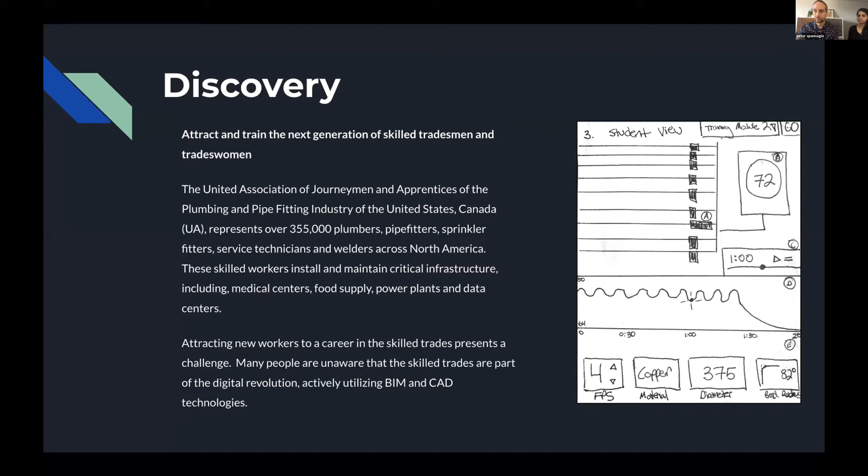So then, as we left discovery, we zeroed in on an MVP solution. We wanted to recreate our in-person training as rich interactive content. We wanted to include IoT data monitoring and visualization, particularly to be able to run these IoT simulations based on the historical data. And two other wow factor items for us were the ability to insert 3D objects, to have these teachable moments and to break down complex information, as well as to offer students and instructors the ability to learn, whether it would be in web, mobile, or VR.

The features that you'll see today will move from a brief presentation into the full demo of our working code here. A few features I want to quickly highlight. So within our solution, you can link a Matterport scan, but you can also upload really any 3D scene or model. For the educational use case, we had the ability to add rich content and quizzes, as well as to track student progress and scores.

We'll see today the IoT monitoring from multiple data sources, the ability to have failure simulation and play and pause of the simulation data for a teachable moment. We have the basic functionality for a two-way IoT interaction, as mentioned, and the ability to insert 3D objects and API integration with Forge and BIM 360. As for the technologies that underlie the solution, we used a React web app, the Matterport SDK, the mentioned Forge and BIM, and also used A-Frame.

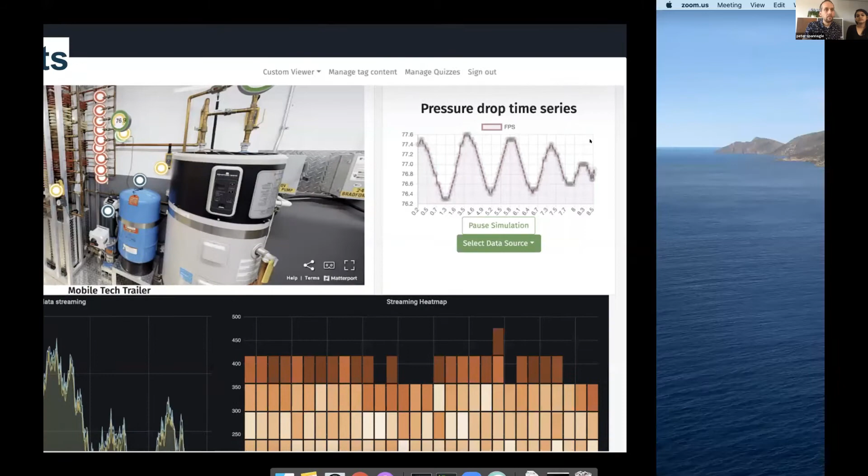Let's go ahead and move over to the demo. Let's see. There we are. I think I got to get out of full screen. There we are. Cool.

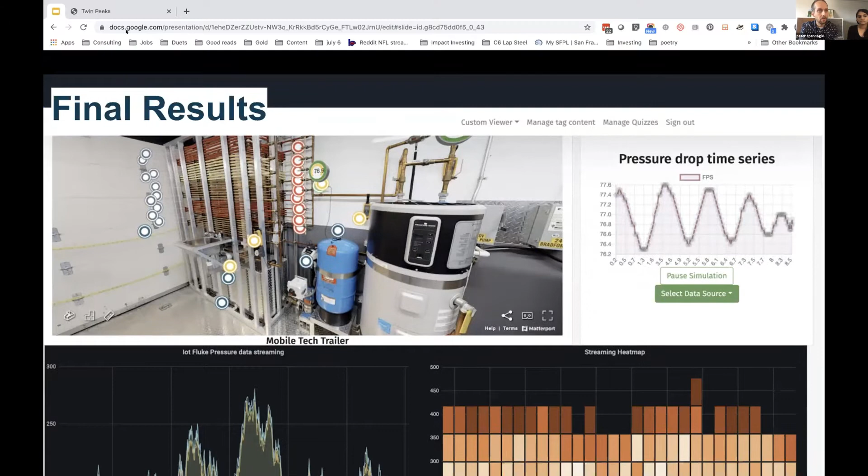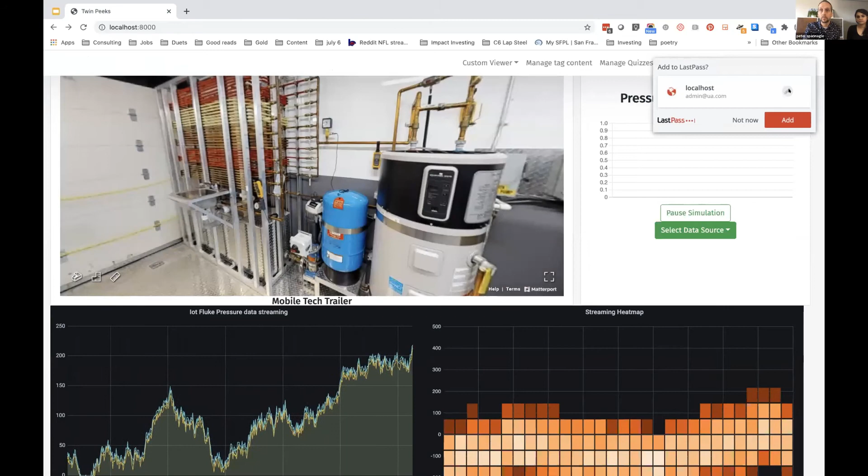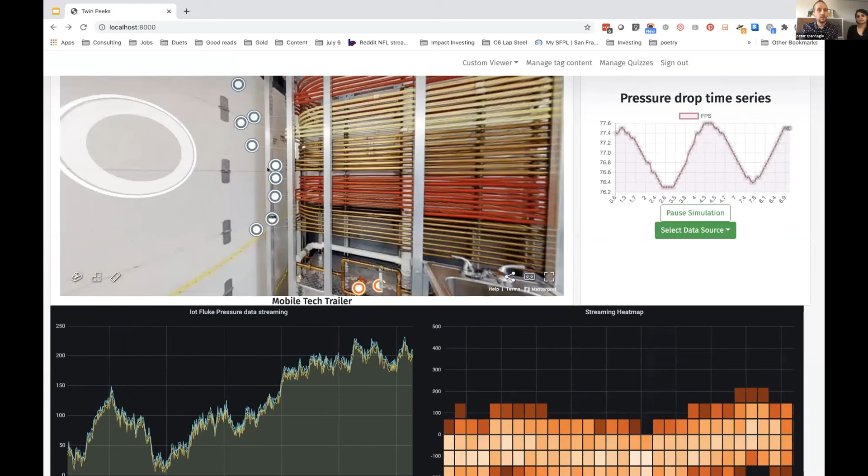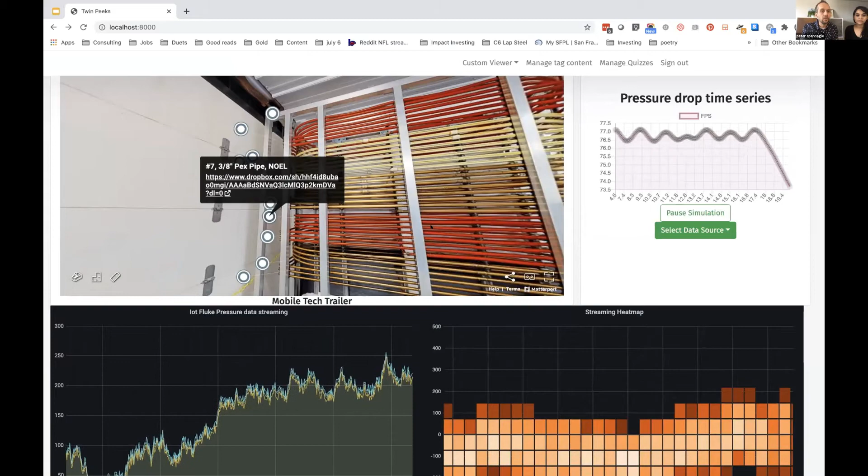So we'll start out by simply logging in. And that drops us into our dashboard. Up front, we see our digital twin. This has been enriched with a variety of tags, content added by the UA that helps to turn this into more of a training environment, as well as

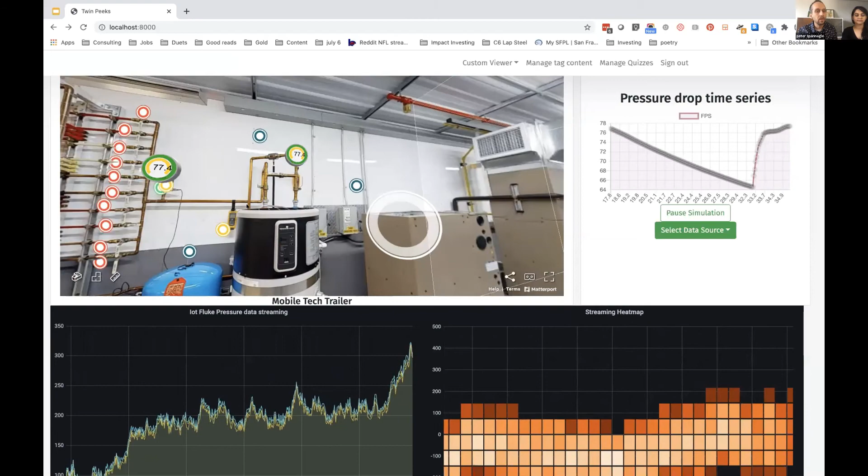the incorporation of these gauges, which are providing live readout of the simulations that you're going to see running here on the right. So this is the virtual training of the hydronics module that's using the historical data provided from their Fluke sensors. And you have the ability to play and pause the simulation to have a teachable moment around why pressure drop may have occurred.

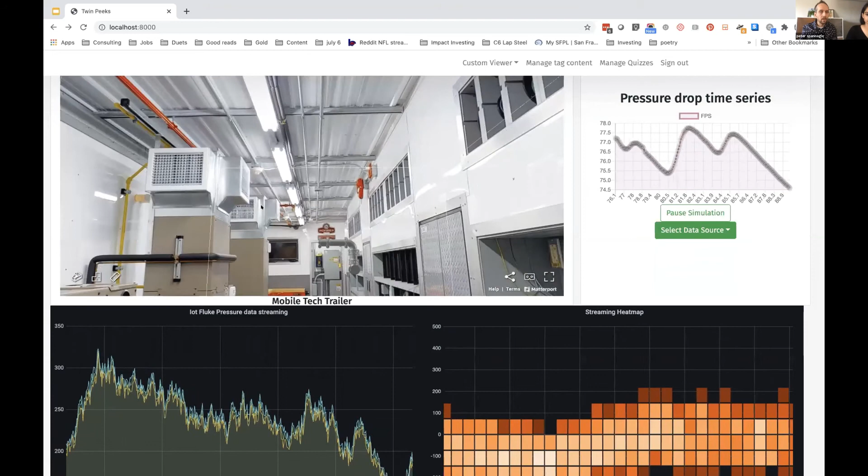We have the ability to use a variety of data sources that have been provided, and obviously to extend this. And as well, I mentioned the option to embed 3D objects directly inside of the digital twin.

Down below, we have the Grafana installation. So we mentioned UA wasn't able to provide us with the live IoT sensor data. So instead, we've focused on the historical and having the training data running there. And we've included here the ability to counterpoint that with the live sensor data that we'd have flowing in down below.

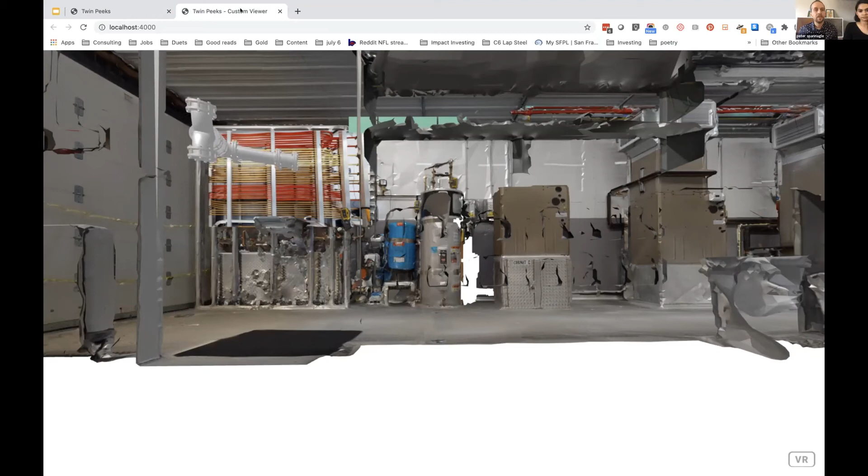A few other options I wanted to briefly run through with you. The custom viewer. We were quite excited about the ease of use of Matterport and some of the cool features built into the Matterport SDK, which we explored. But we also wanted to open up a range of features and possibilities that were unlimited. So here we've used A-Frame to import the Matterport scans, the OBJ.

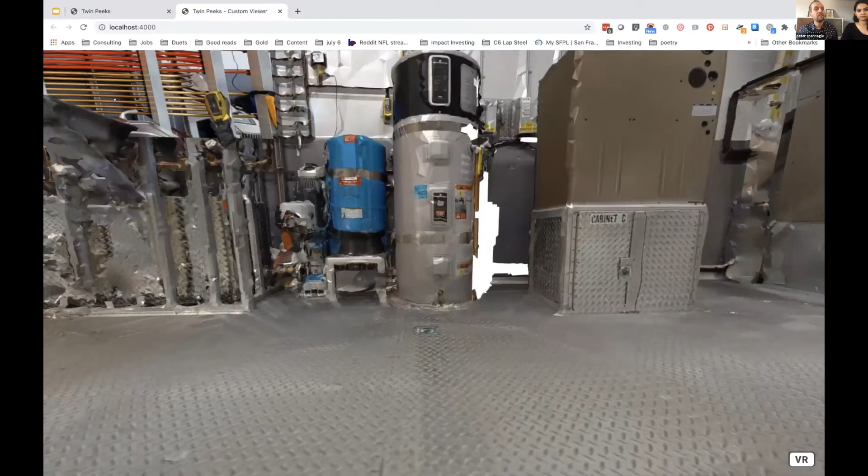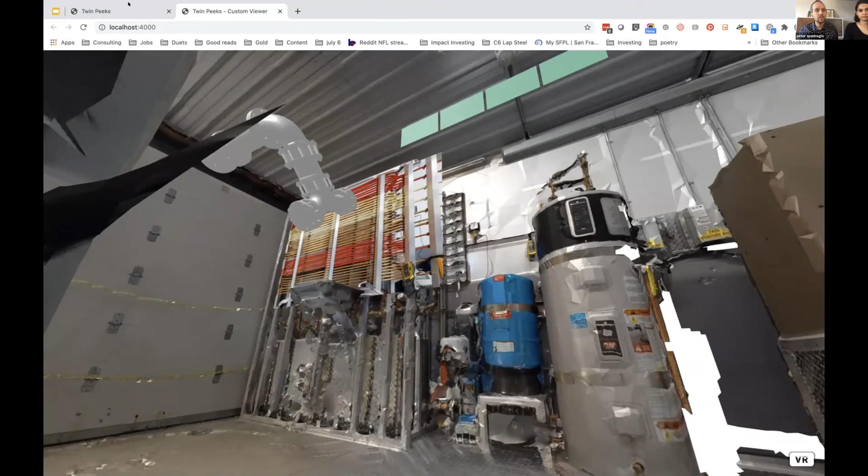Here you can see, for example, we start to show how you can embed the 3D objects, have menus and ways to interact. So this gives us flexibility to import any 3D scene object and to take on functions that would be outside of Matterport.

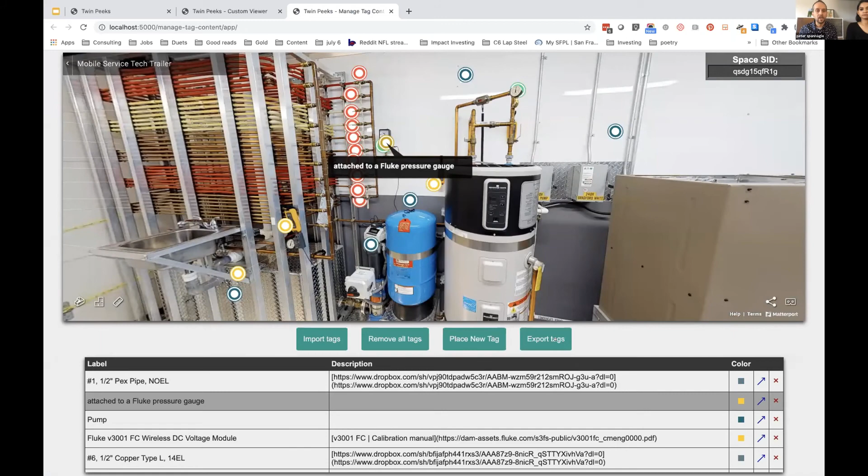As well, it is important to provide the functionality for the trainers to modify, add, and work with their tag data. So again, this is all through Matterport SDK, ability to manage, import, export tags.

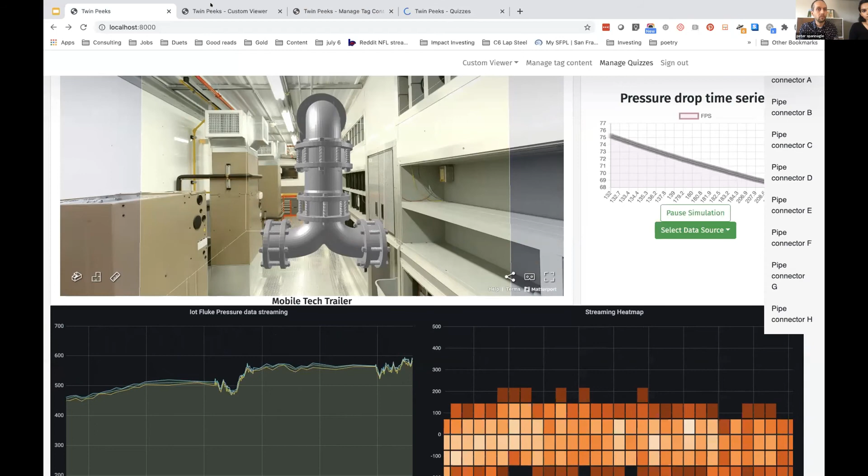And then finally, the educational content. Another piece of Matterport SDK that we explored and was quite exciting for UA and I think most other educational use cases is the ability to incorporate quizzes and educational content directly inside of the Matterport scan. Here we can see an example in context, training happening within the digital twin.

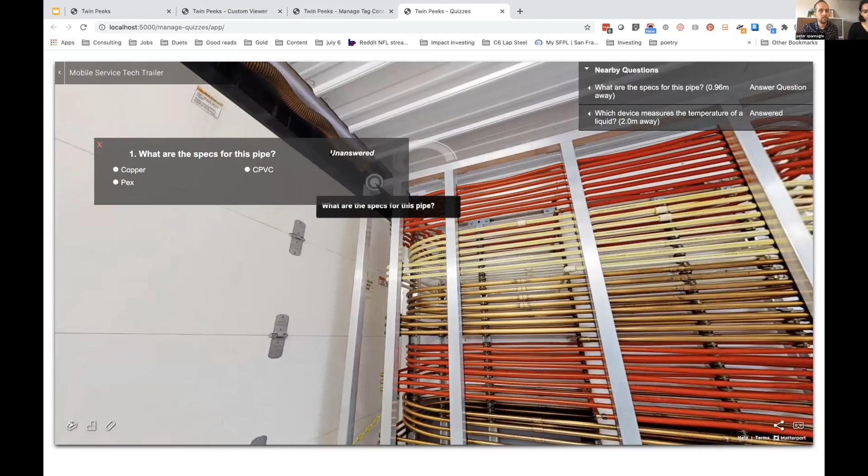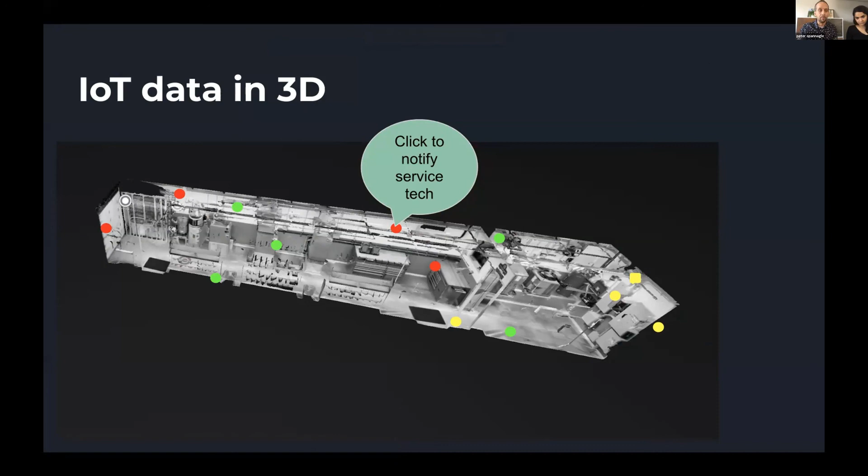In terms of what's next for us, you see how we have zeroed in on really a single module within the trailer. And with this infrastructure and a little more time, we'd be able to repeat and extend this to create virtual training for every training module inside of the physical trailer. It also offers up unique opportunities, for example, for admin to view live sensor data within the digital twin, and as I mentioned, to even control those through a bidirectional interface.

Next steps for us: Knox and other secure containers, we talked about security. Ability for admin or permissions to access controlled areas in the scan. 3D visualization inside of the scene. Really rounding out this educational training platform and expanding to adjacent areas like facilities management, provide simple solutions to expand the adoption of digital twins.